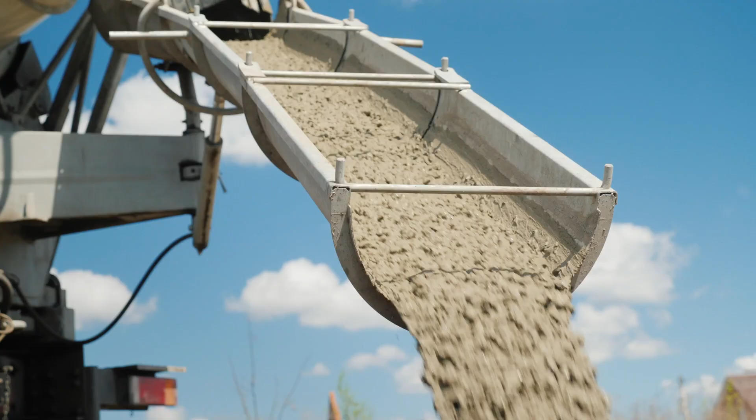The construction industry undoubtedly is one of the key contributors setting in motion an unprecedented global environmental crisis. 60% of the buildings and 25% of the infrastructure on Earth by 2050 still yet must be built. The building sector, widely dominated by reinforced concrete constructions, is responsible for 40% of the global energy and process-related CO2 emissions. Decarbonization of the building sector is critical in meeting the 1.5 degrees Celsius Paris target, but emissions associated with the sector reached an all-time high of 10 gigatons CO2 in 2019.

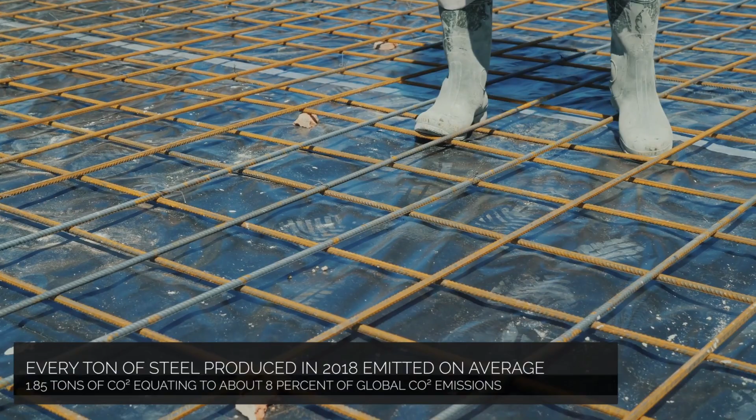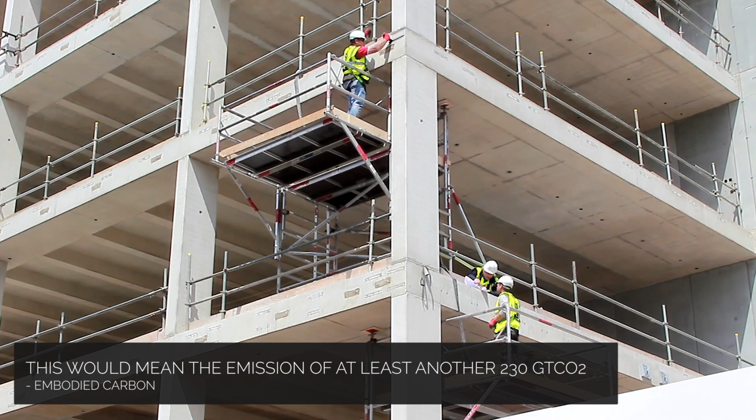Cement production alone accounts for 8% of all global emissions caused by humans, and the same applies to steel production. Thus, by 2030, embodied carbon emissions from all building activities will need to be reduced by 40% according to recent calculations. If everyone on the planet consumed as much as the average US citizen, 4 Earths would be needed to sustain their lifestyle and energy consumption.

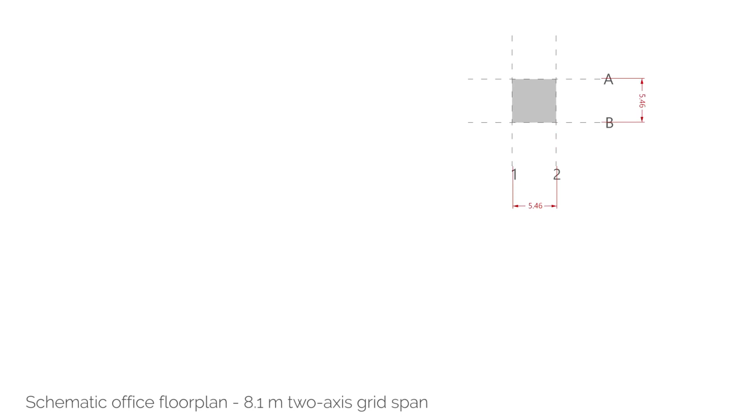The question arises, what actions we as builders can explore to foster a more sustainable construction process for the immediate future. Our line of inquiry focuses on a specific type of architectural space that can be found throughout most of the world, the office space.

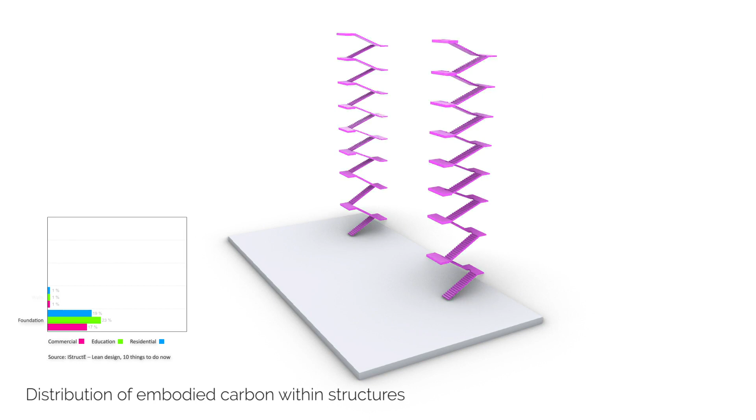Usually, the layout is designed on a repetitive two-dimensional grid, which is followed by a 3D evolvement of the building. A fully glazed post-beam facade structure is still a preferred design choice, even though the caused environmental effects on the indoor climate present many challenges.

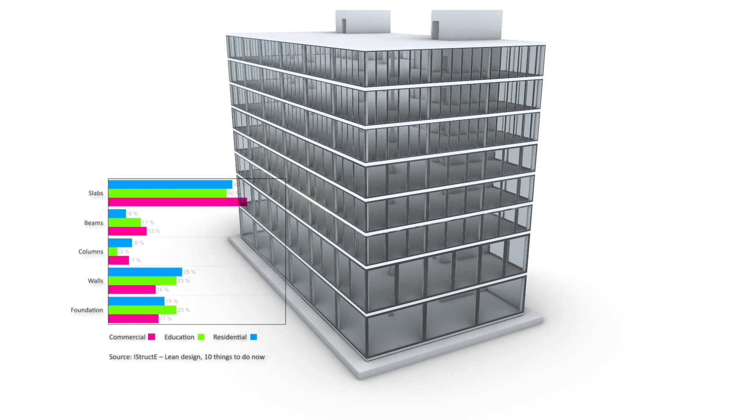Evaluating the embodied carbon for each isolated building subcomponent highlights that the slab construction alone contributes about half of the total embodied carbon and material usage. This finding only targets the raw structural construction.

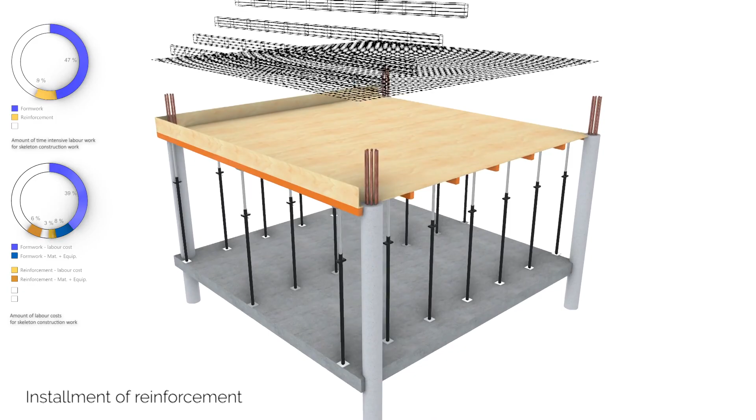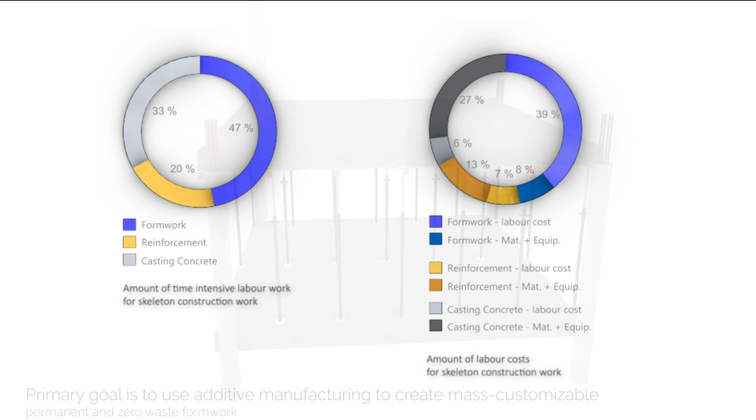We therefore zoom into a subunit of the building. Reinforced concrete slabs require an extensive usage of formwork and steel reinforcement before the concrete itself is poured on site, whereby almost half of the costs and labor efforts can be found for the installation and assembly of the formwork. Additive manufacturing could be used to create zero-waste and highly customizable formworks with the potential to further reduce the overall usage of reinforcement and in-situ concrete.

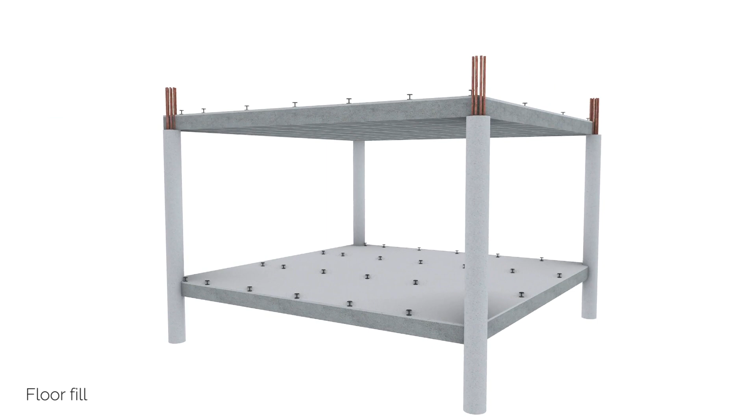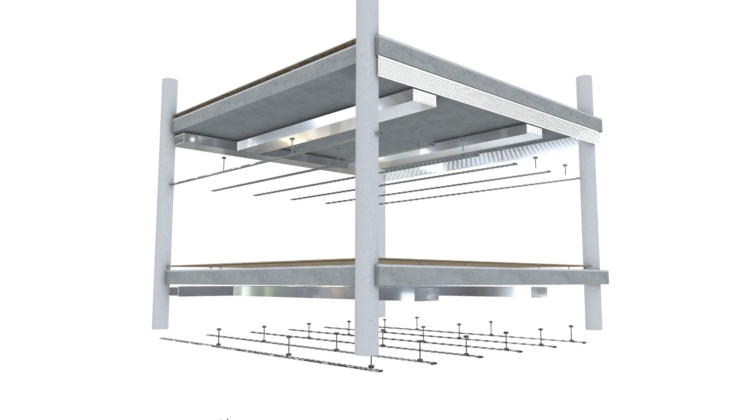In office buildings, a common strategy is to install an elevated floor. Mechanical, electric, and plumbing units are usually installed on the ceiling, regulating, for example, the mechanical ventilation. This form of ventilation, in conjunction with noise disturbance by the inhabitants, result in the installation of retrofitted acoustic ceilings. The installation of the facade with further connection detailing completes the assembly. We end up with a total construction package ranging between 50 to 80 centimeters.

The aim of this project is to reduce the slab's material consumption by at least 50% and to integrate functional layers only by the means of geometric manipulation, hereby minimizing the overall slab package.

Ceiling constructions always have been a canvas for artistic expression, but also displayed the ingenuity of the current status quo in engineering.

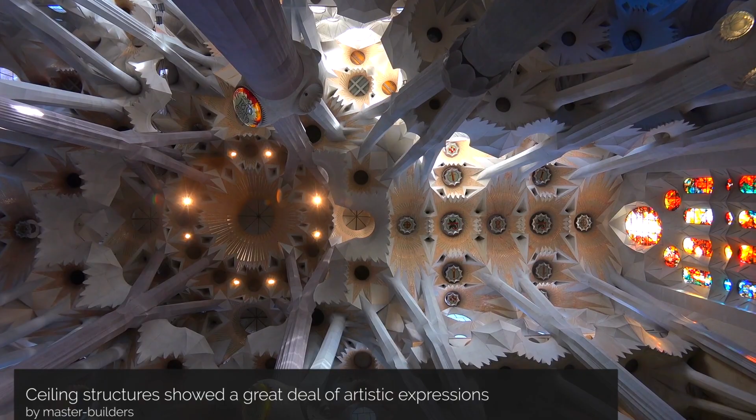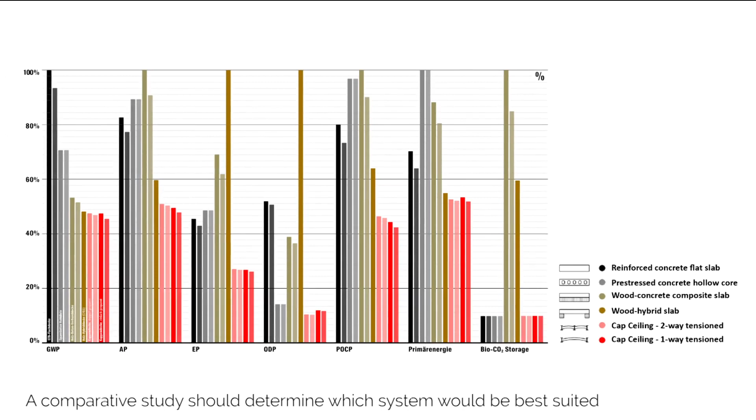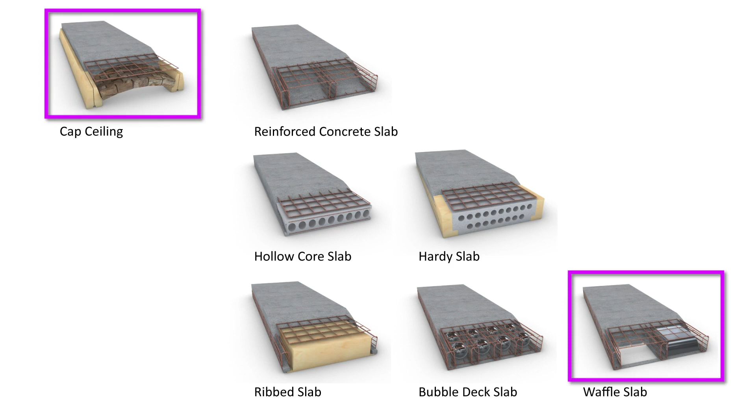In a study, current slab construction systems were analyzed. Although all systems have potential to be optimized for the stated application, 2 systems, the cap ceiling and the waffle slab structure, seem especially promising. Studies showed that the systems already offer great potential based on a life cycle assessment of reducing embodied carbon, but also offer, for example, good sound absorption qualities.

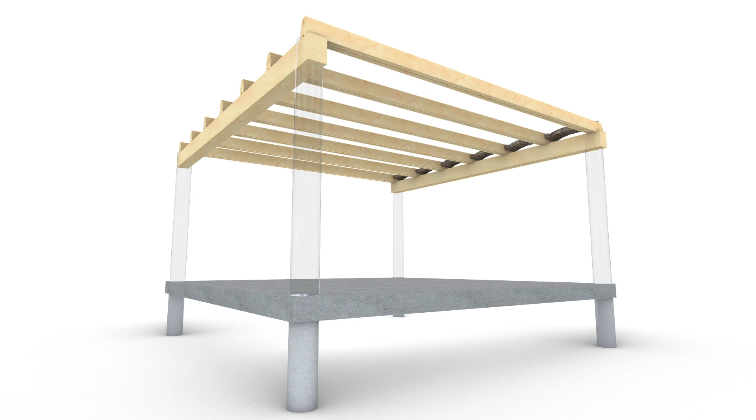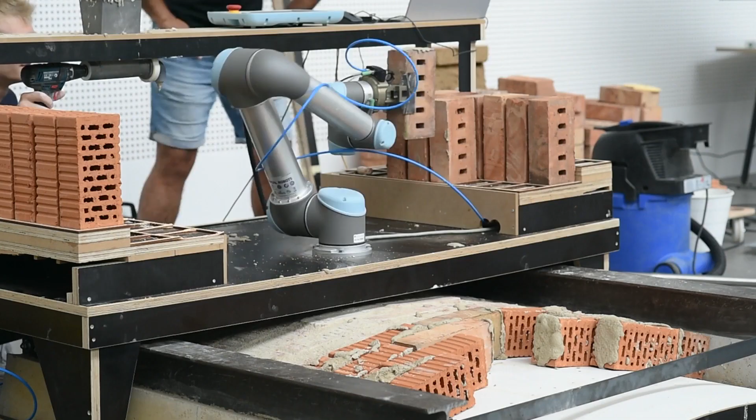The project Kappe Plus aims to revitalize cap ceiling constructions. A hybrid system of wooden twin beams and assembly of reused, but also function-integrated additive manufactured bricks were explored. Due to the diminishing of skilled craftsmanship capable to build cap structures, an exemplary robotic fabrication hub was realized to evaluate the feasibility and automation potential for such structures.

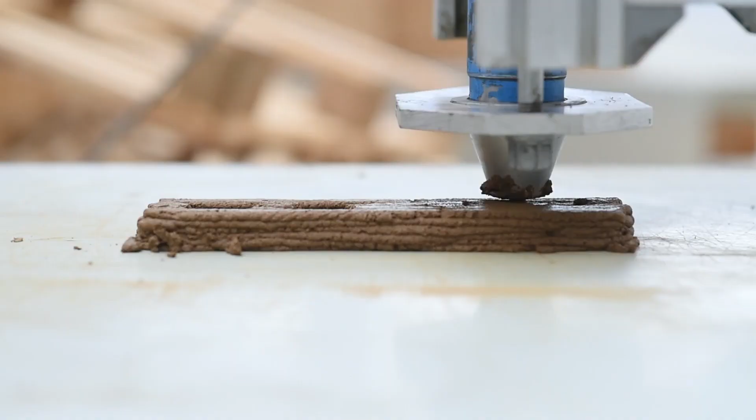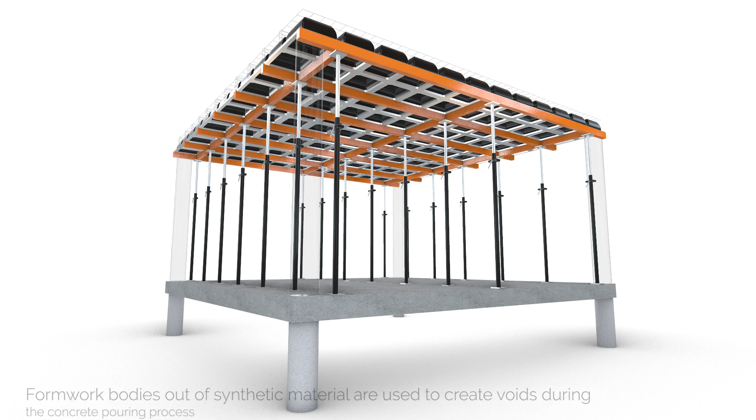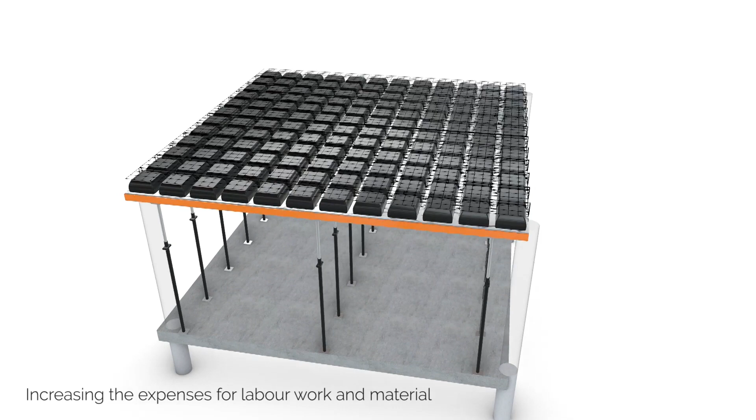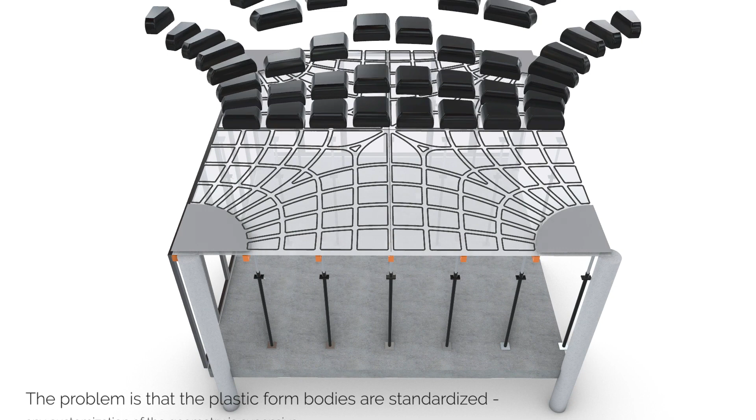Pierluigi Nervi explored alternative form-finding methods following the principal bending moments to foster a more optimal geometric articulation of the rib structure. An algorithmic process was designed by our team to analyze and generate such form-found patterns. As mentioned, the problem is that such customized plastic formwork bodies are very expensive to produce. Large-scale additive manufacturing could solve this shortcoming.

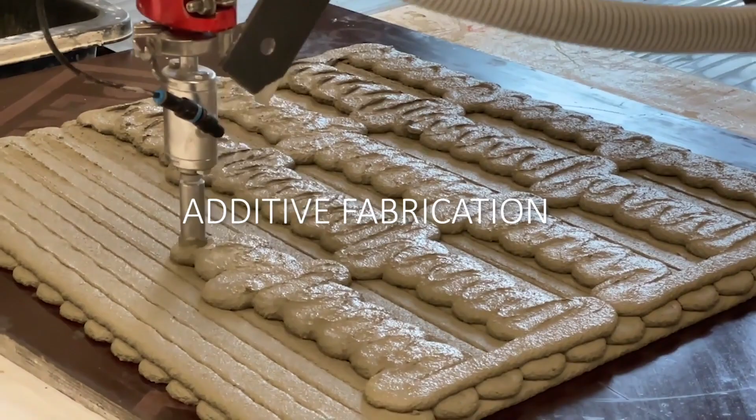An automated, algorithmic, and digital process was created to design and fabricate the customized formwork bodies.

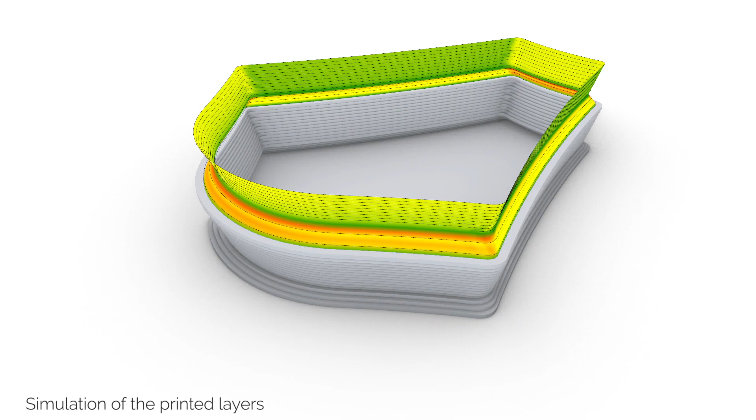We start with the vertical extrusion of the side walls, which can be shaped depending on further aesthetic or performative qualities. The slicing process defines the attributes of each printed layer, and additional algorithms can evaluate and adjust overhang conditions or optimize the structural integrity of the freshly printed material to ensure its printability.

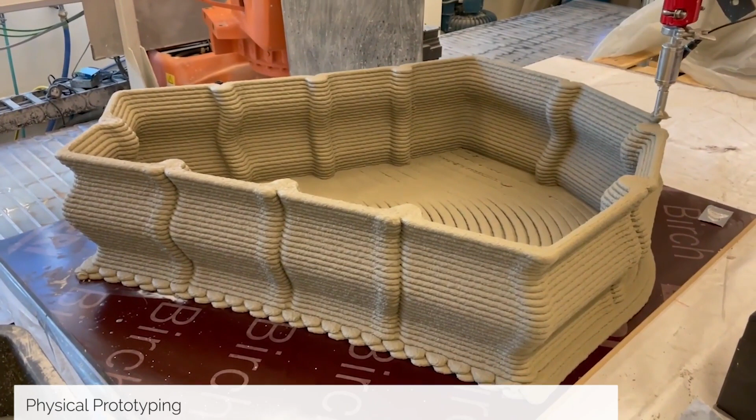A custom print path generator enables further generation of the machine code for the physical prototyping. With this process, highly customized geometries with surface detailing below sub-centimeter level accuracy can be produced quickly and with ease.

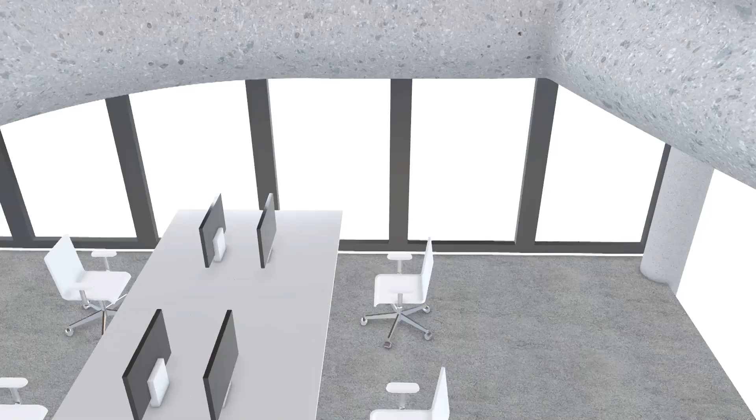Such objects are usually referred to as lost formwork, but unlike other systems, these 3D printed geometries stay as permanent or zero-waste formwork in the final construction.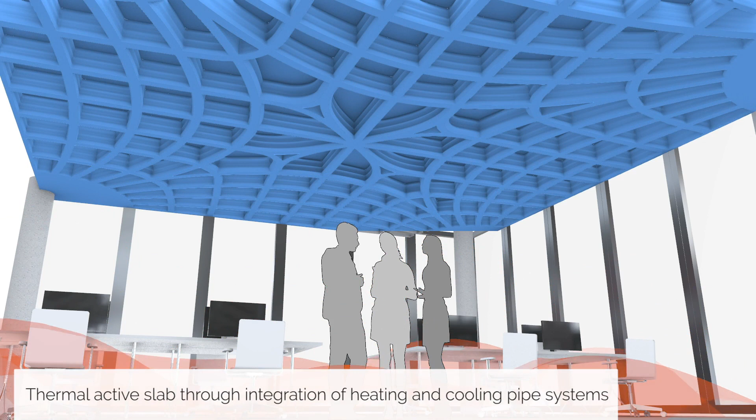This allows exploration of additional small-scale geometric form finding to integrate thermal and acoustic properties. Thermal active building systems use heating and cooling pipe networks that are embedded into, for example, the ceiling.

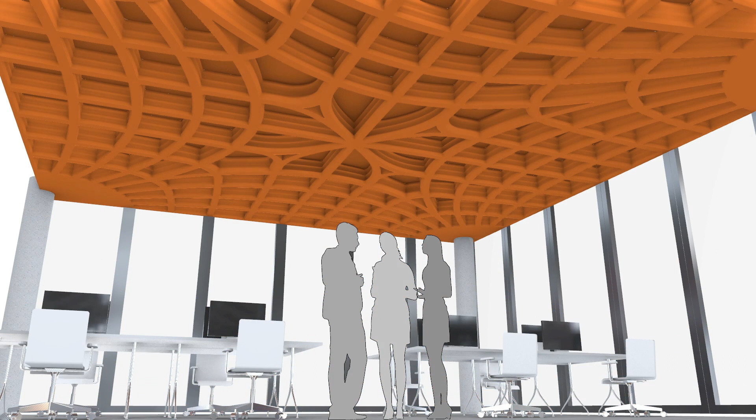By creating a larger surface area and reducing the volumetric mass via the formwork bodies, the heat transfer can be regulated more dynamically. But retrofitted acoustic ceilings would diminish the effect of such slab-bound systems.

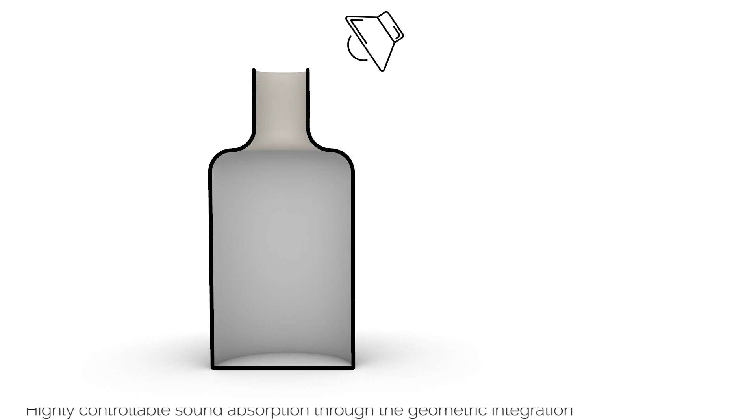So therefore, a novel process was evaluated and tested to calibrate the sound absorption by further geometric detailing of the formwork bodies. An algorithmic process was programmed to create highly customizable Helmholtz resonators.

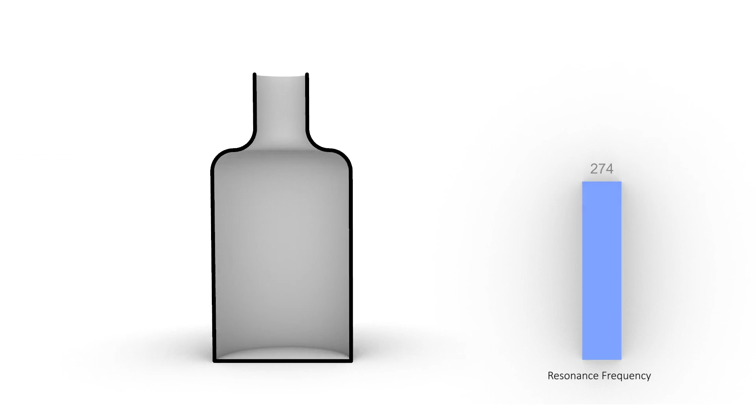These are void cavities that act as sound absorbers and can convert sound energy into heat as sound waves within the various frequency bands accelerate a small air mass in the neck of the resonator against a larger body cavity.

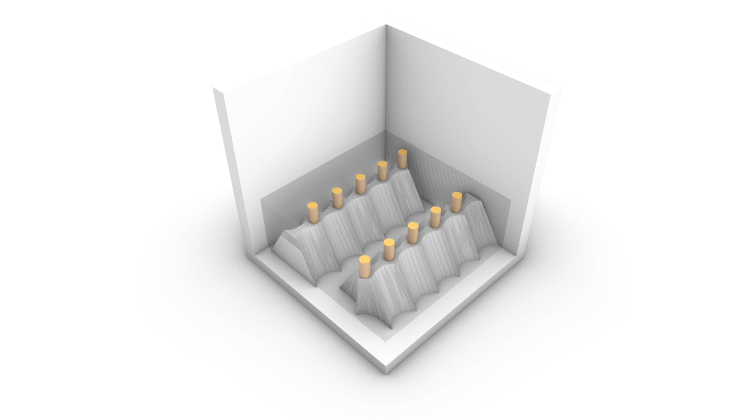Acting as a spring, depending on the volume of both the bottle neck and the bottle body, various frequencies can be absorbed. These cavities can also be arrayed to form a compound linear absorber.

Various geometric attributes of the resonator were modified with the goal of increasing absorption at resonance and increasing the bandwidth of the effective absorption range.

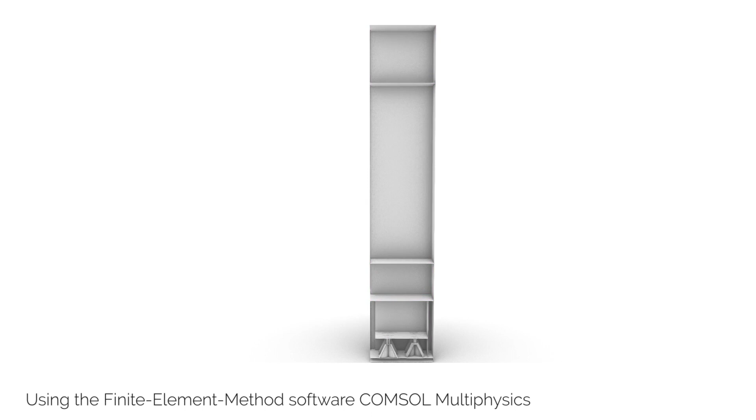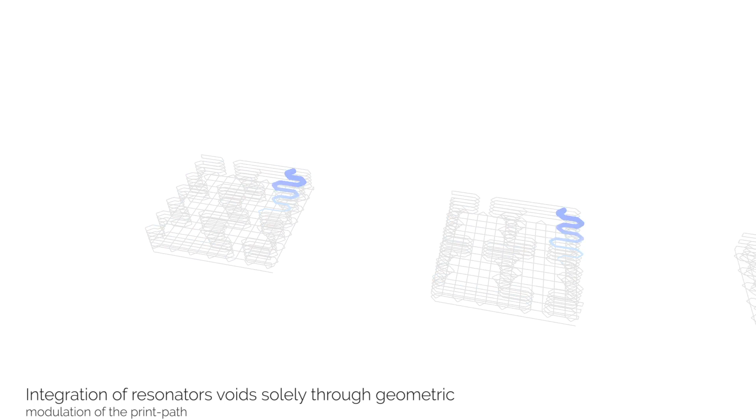The algorithmic model was imported directly into the multi-physics simulation environment, COMSOL. The incident and scatter pressure fields were simulated, from which the surface normal absorption coefficients were calculated.

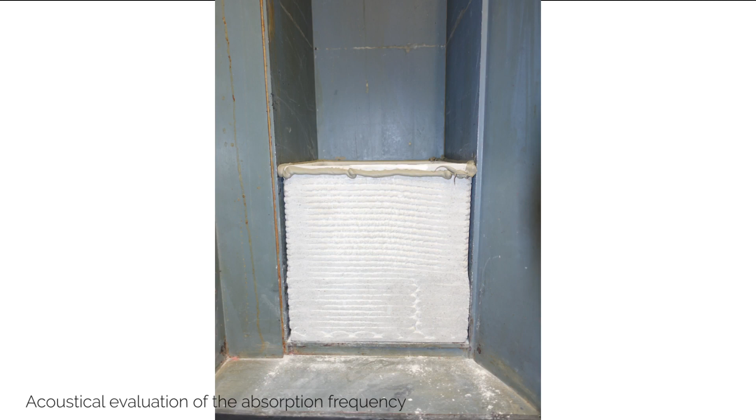Subsequently, the numeric model was compared to a set of 3D concrete printed physical twin models which were tested in an impedance tube. This process showed that the numerical and empirical results had a high degree of overlap, proving that

the formwork bodies could individually or as a cluster be precisely calibrated to act as sound absorbers just by means of geometric form finding.

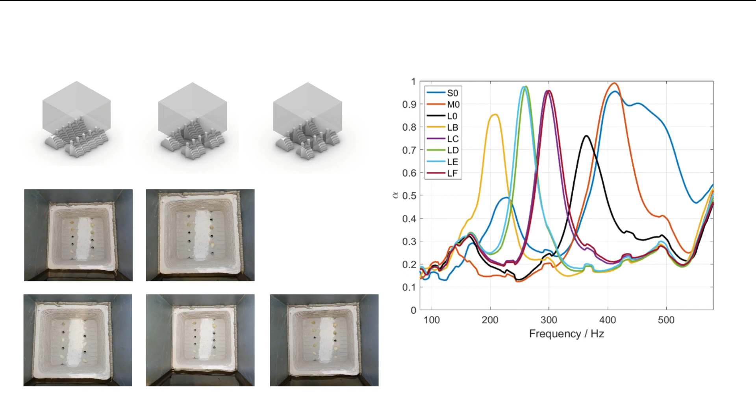A custom algorithm was designed to integrate such resonator cavities into the print path generation. Various parameters controlling the shape of each cavity, but also again as a combined spatial system, can be instantiated for

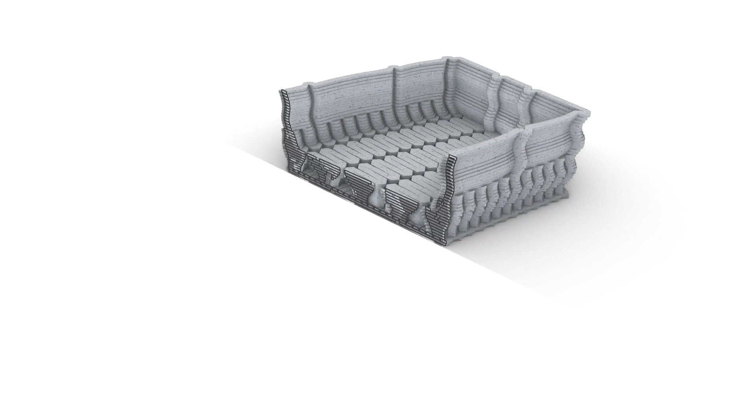the necessary acoustic threshold values, for example, absorption, diffusion, reverberation, and scattering, while ensuring conformity with DIN standards.

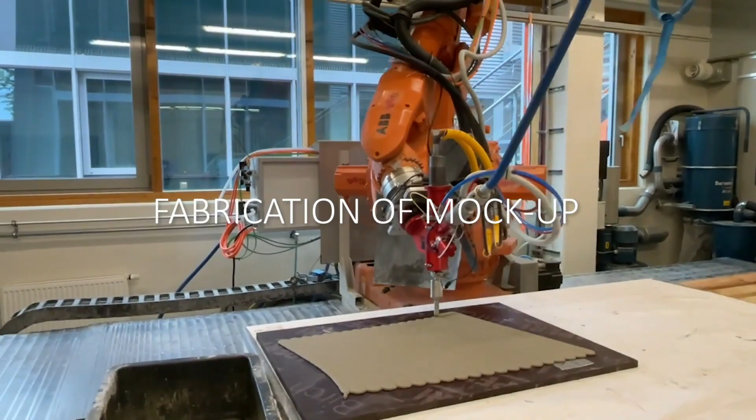By simulating the printing process, including cement hydration, curing, and autogenous shrinkage, the usage of CAD and CAM software can offer more complex design features.

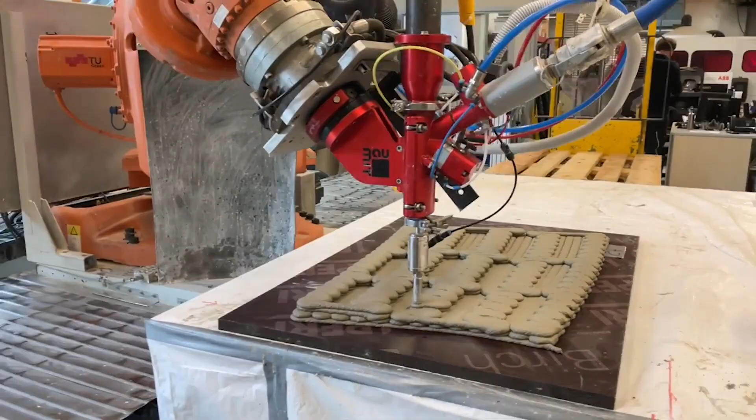Previous research pointed out that printing speed optimization is crucial to find a balance between buildability and interlayer adhesion, both of which are strongly dependent on the waiting time of layer-on-layer deposition.

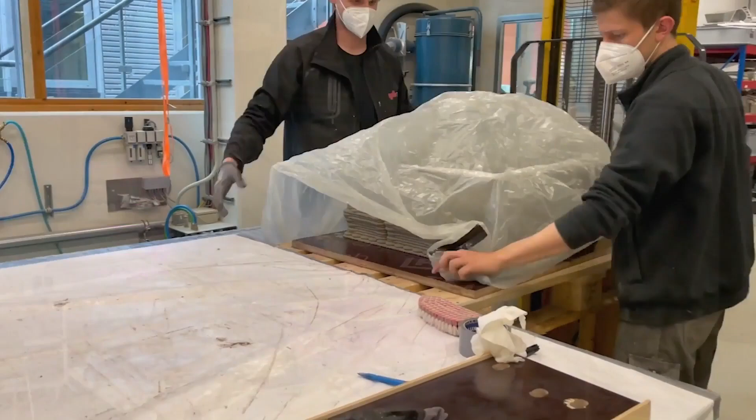Our custom manufacturing process allows control of these parameters, which could massively help workers on-site to use on-site fabrication hubs to detect any small deviation in the ongoing construction work and use the accessibility of the design features to locally

alter the individual geometry, enabling the overall element to fit more precisely in the actual environment.

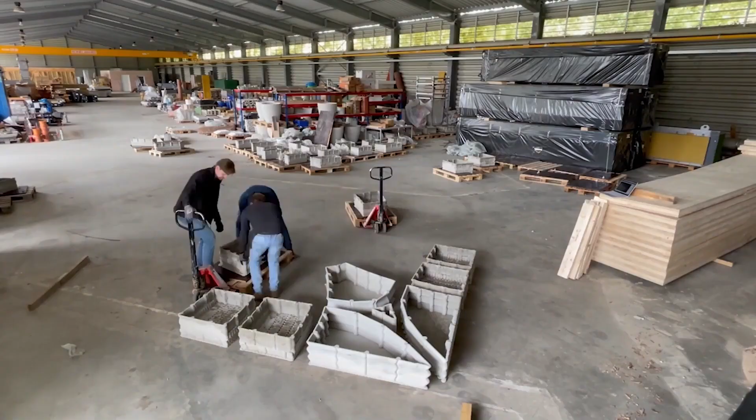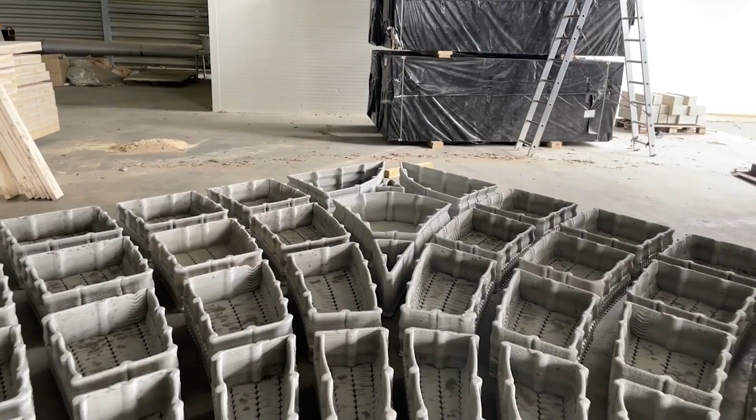The custom workflow proved to be very robust, as all of the 36 individual formwork bodies for the demonstrator could be built within 1 day without errors. Due to their low weight, the printed modules can be easily managed by 1 or 2 workers.

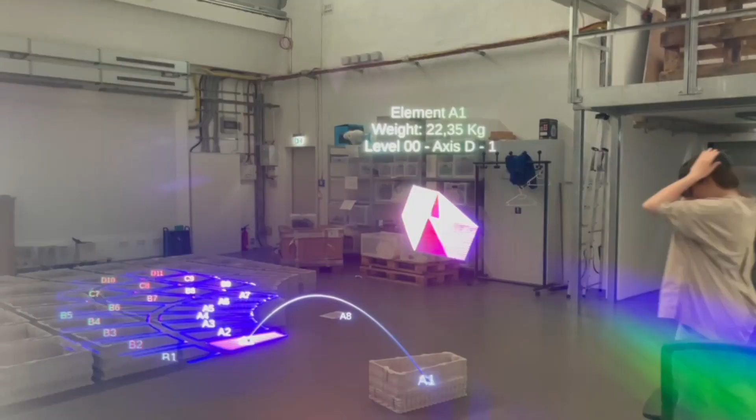To further streamline the montage sequence, all formwork bodies were tagged with Aruco markers containing information such as the individual position of the piece in the final construction and their weight. Regardless of their current position, each formwork can thus be identified via the associated marker and accurately positioned through holographic instructions.

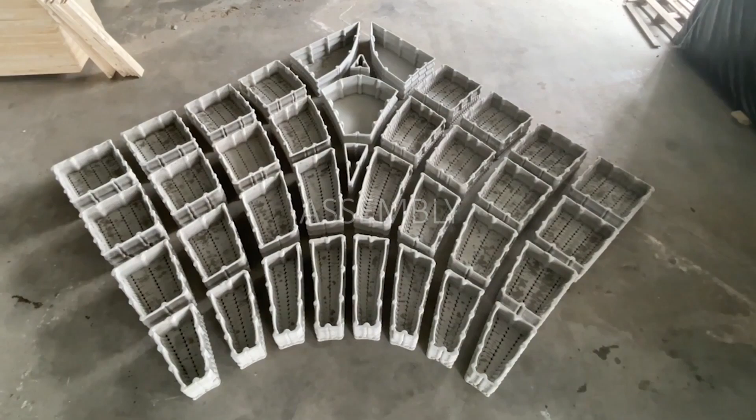Currently, a catalog of construction systems and formwork geometries is being generated, with applications ranging between renovation and future construction projects.

Overall, this first research stage could successfully prove that the usage of multifunctional formwork bodies can result in a massive reduction of the deployed resources for slab constructions.

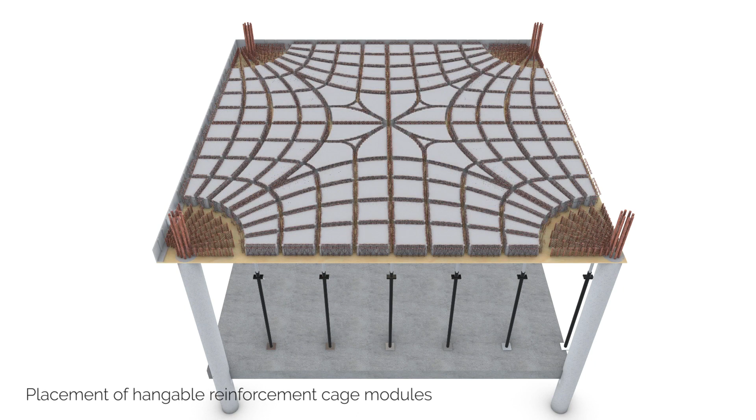Additionally, only by means of geometric form finding, linked with state-of-the-art digital analysis processes, properties such as sound absorption and thermal exchange can be integrated into the articulation of the formwork, making retrofitted functional layers obsolete.